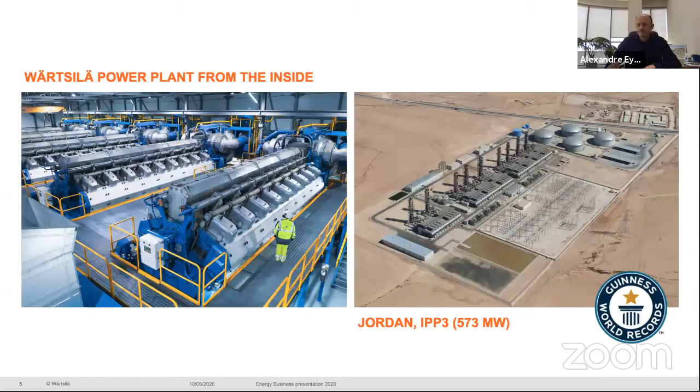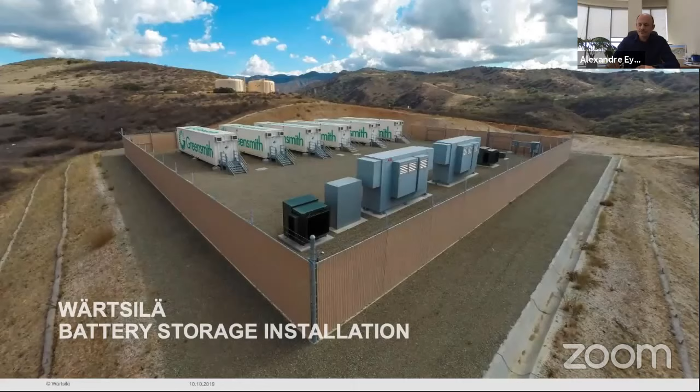Now, looking at where we are in the Middle East. Today we have slightly over 7 gigawatt of installed power with about 300 installations. Our headquarters is in Dubai, the center of the universe, I say, where a lot of our experts and the digital expertise are based. But we have positions and branches pretty much in the entire Middle East. Pakistan with Lahore, over 400 engineers to support the 2.1 gigawatt that we have installed. Jeddah, we have about 250 local guys to support our 1.9 gigawatt. And then obviously we have positions in Iraq, Yemen, Oman, Qatar, Jordan. So we are spread pretty well. We always love to be as close as possible to our customers.

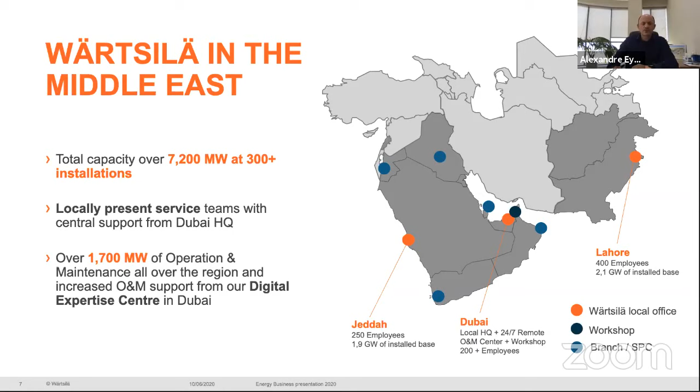Looking at the energy scenarios, Middle East countries are gradually transforming their fossil-based power generation fleet into sustainable and diversified energy supply, and we have seen it very clearly in the recent increase of solar activities. The question for us today is: will this be enough to reach the most affordable, the most sustainable energy? And how we navigate the path to this future is probably less clear. During the webinar, we're going to try to walk you through that idea. We want to help you understand better how the energy transition will unfold, with renewables becoming the base load. We believe we can help in designing and building the transitions with the proper planning, and we are ready to provide you with the best service that we can.

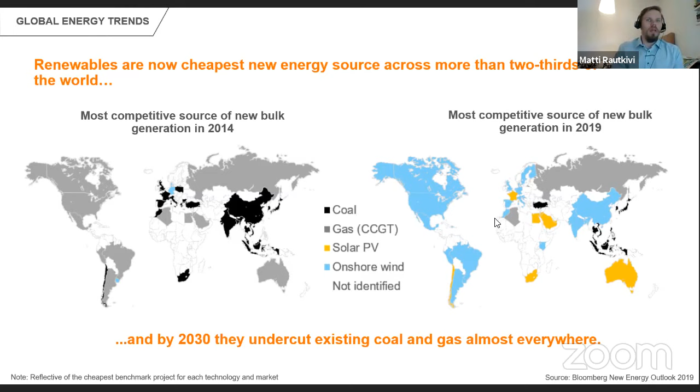And when economics start to play the game, things happen way faster. We have witnessed this transition already in countries like the United States, Australia, Europe, and now also the Middle East, heavily coming into the game with so cheap solar PV coming to the market. Moving forward, let's look closer at what it means from the installed capacity perspective, and how fast this will change the landscape by 2040.

What we call new technologies, renewables and flexibility, represent around 17% of the overall capacity mix in 2019. By 2040, in 20 years, this will represent 57% of the capacity. So a massive shift towards renewables and flexibility. Also good to notice that while total capacity in the world was around 7 terawatts, 7,000 gigawatts, in 2018, by 2040 it will be 15.5 terawatts.

Because of the nature of renewable energy, we will need more capacity, and a lot of investments are required. So one of the key things is to ensure renewable energy is available, that we are able to finance this and get these investments moving. Looking closer, what gets the eye every time is how much wind, which is light blue here, or solar will be installed.

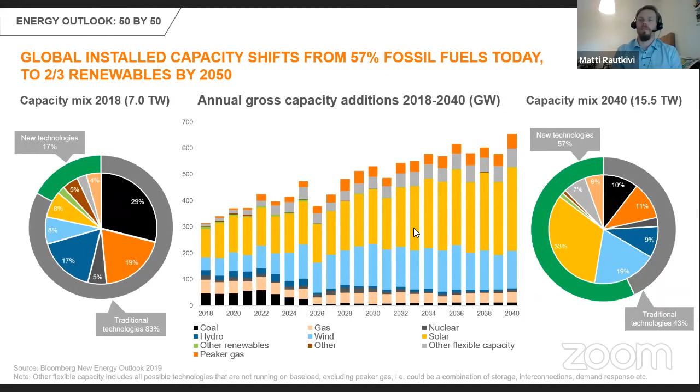But where we are focusing, and what Alex mentioned about our portfolio today, is flexibility: how you integrate these affordable renewables into the power system of the future. Here we see exactly the same kind of development. From the capacity perspective, flexible gas and energy storage are the fastest growing markets in the next 20 years, where we're going to see investments.

On the left-hand side you can see the light gray, which is baseload gas, traditional combined cycle gas, that is actually declining over time, driven once again by renewables changing the operational profile of these combined cycles. We have fewer running hours, more starts, and system modeling starts to heavily favor intermittent or intermediate and peaking types of application, which is the orange bar here.

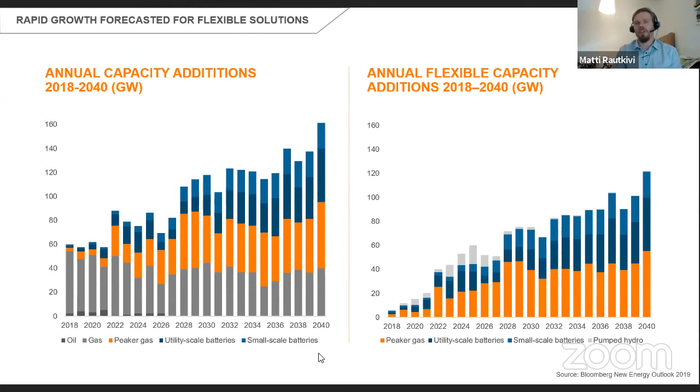So the market for gas engines and flexible engines will grow, according to Bloomberg analysis, from around a 5 gigawatt market, which has been the bigger market, up to 40 gigawatts by 2040. So massive change there, as well as in energy storage, which is also a heavily and fastest growing market.

So if we look at the energy trends, it's obvious now, when people start to understand how fundamentally renewable energy is changing the landscape, that there is no room for baseload anymore. We need more peaking capacity, and when you go beyond a certain threshold, depending on the energy system, energy storage starts to play a key role there on a massive scale.

I would say that in every power system there's value already today for energy storage, but when we start to talk about massive scale energy storage installation, then we are talking about a lot of cheap renewable energy and excess renewable energy available. But by 2040, so in the same time period, in 20 years roughly, we're going to see 122-fold growth in energy storage.

So even though it's a hot topic now, and we talk a lot about it, we celebrate the newest deals and the biggest deals, this is just the beginning of how the growth is coming.

So a lot of renewables, a lot of flexibility coming to the power systems. And now, even though we are in the middle of the crisis during the COVID-19 situation globally, and this is definitely a new situation for the whole world, something interesting has actually happened during this from the energy transition and energy system perspective.

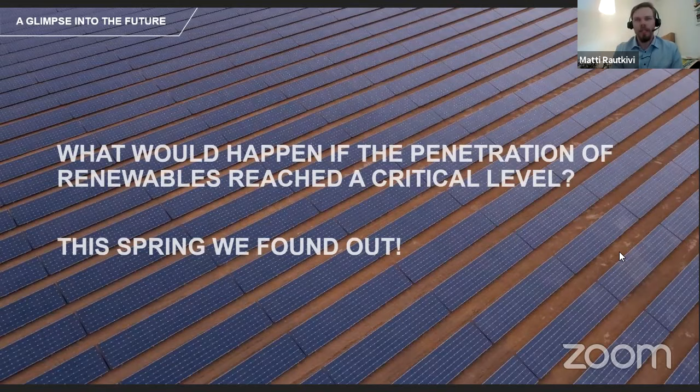This spring, we developed a tool. You can Google it, and here's the source, Wärtsilä Energy Transition Lab. It's a really cool tool that gathers all the information of the European electricity system. We can put basically any power system there, but the information from the European Union is easily available. And we can look at how the system is operating, what the price levels are, what is generating, what the transmission flows are, and how the systems are performing now.

So this has led us to a situation where we have a higher share of renewables than ever before, globally I would say, but especially in Europe, where a level of 55% renewables across the whole of Europe was met in May. And there are days when Germany, for example, is generating around 80% of its energy with renewable energy. So countries are experiencing massive amounts of renewable energy that we were expecting to see at 2030 levels as we continue the installations.

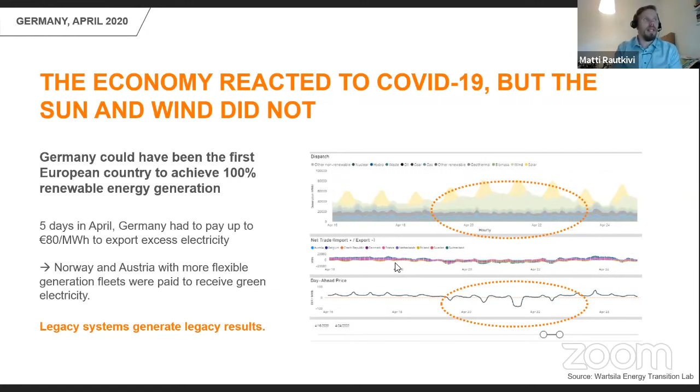As a summary, before moving to Patrick, I can say that the energy transition is going on, driven by cheap renewable energy, driven by economics, and that is opening a totally new era and an increasing market for flexible gas and energy storage. And go and check out what has happened in Europe this spring. That's just a glimpse of the future and evidence that this will make a lot of sense in the future power system.

So leadership on low-cost energy can play a crucial role for the countries to reach their Vision 2030 targets, and there are some changes in the energy mix which can also contribute to this transition. So let's see what changes we see in the Middle East. The first one is what Matti described very well, that renewables are becoming the cheapest source of electricity. This is especially true for the Middle East.

The region has excellent renewable potential. A solar panel in the Gulf produces twice as much energy as the same unit does in Germany. And let's not forget about the wind potential that the region holds. Saudi, certain parts of Oman, and Kuwait are all blessed with very consistent and strong winds.

So if you take a look at the screen, you'll see that solar PPA prices today in the Middle East are already below the price level where solar PPA prices from other regions are expected to be in 10 years. So no surprise that this makes solar PV generation the cheapest source of electricity, places it first in the merit order, and it also holds a huge upside potential to further reduce the blended cost of electricity in the region.

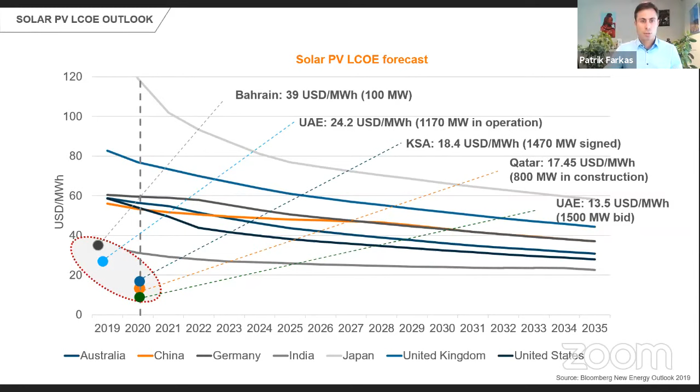This is a global trend, but moving to the second driver, this is very specific for the Middle East, and that's basically the decoupling of power and water generation. The Middle East is the largest market for water treatment, and nearly half of the global desalination capacity is located there. But while the rest of the world applies membrane-based desalination, the Middle East is still dominated by thermal distillation, which requires heat.

But now we see more and more countries committing themselves to phase out this old-fashioned thermal distillation, and it will have a very important consequence. It will lead to a structural shift. The traditional IWPP model will come to an end, and power has to be a separate, standalone, and competitive product. It will encourage competition between various power producers to generate power at the lowest cost, and also let a great portion of inflexible and inefficient generation leave the market. Then the gap could be filled with renewables or other smart and more sustainable technologies.

The third change driver is related to oil economics. No surprise, however, the long-term consequences of this are still a little bit uncertain. On one hand, we see that the current depressed oil price environment already puts great fiscal pressure on governments and government organizations, and encourages them to increase their operational efficiency and reduce their subsidies. We expect that this will also happen in the energy space, with improvements in transmission, distribution, and generation being introduced.

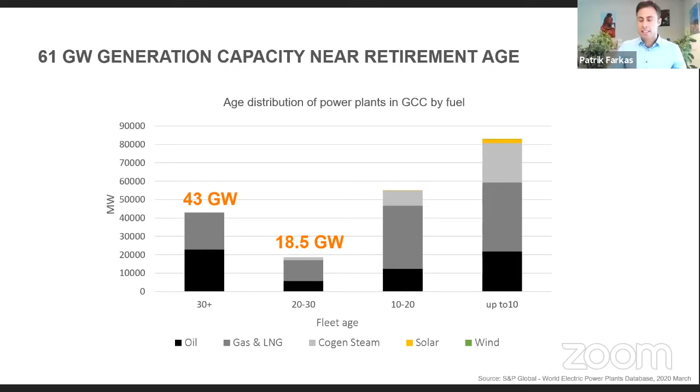So as a result of all these changes, I think that the way we see power generation in the Middle East has to fundamentally change. The GCC countries arrive at crossroads where they need to make agile decisions which withstand a 30-year time horizon. Countries and utilities have to make the right bets on future capacity development today, which will ensure long-term competitiveness, sustainability of their power system, as well as the resiliency of the grid.

The good news is that the Middle East is twice blessed. As said, there is an abundance of cheap fossil fuels and excellent renewable conditions. However, unfortunately, it's still not enough. Power plants with the lowest generation cost will not necessarily lead to the lowest system level electricity cost. The reason why, as Matti highlighted already, is that you still need one component: flexibility is the key word here. Dispatchable flexibility will be the enabler to really unlock this potential and will be responsible for seamlessly integrating various cheap energy sources into one well-working grid.

And probably this is the hottest topic nowadays in the energy industry. The role and value of flexibility is being analyzed by all of the major energy companies and energy agencies like IRENA, the International Energy Agency, and Bloomberg. They all published reports adopting slightly different mindsets. However, there is a consensus building in the industry that due to the price drop in renewables, the cost of bulk electricity is expected to decrease, although the role of balancing and ancillary services will be more important than ever. I have to note that this can only happen if there is a well-working, modern regulatory framework in place that properly values the system-level benefits that flexibility can provide for the whole grid.

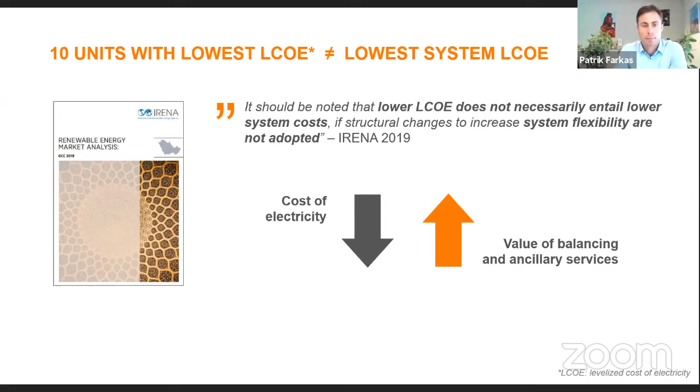So for the Middle East, I believe that the biggest challenge is to have strong and dedicated leadership that facilitates a mindset change, and that mindset change should be based on a true commitment to become a world-class leader in low-cost sustainable electricity in the Gulf. This may also assist the establishment of a second economic pillar.

So Matti talked about energy trends. I talked about the energy changes in the energy sector in the Middle East. But now I would like to demonstrate quickly how utilities can adapt to this new environment. Then together with my colleague Giriraj, we will briefly introduce some tools that can make this transition smooth and easy. So let's imagine a future power system where the penetration of renewables already reaches 50%. I know it sounds a little bit futuristic for the Middle East as of today, but this very much represents the situation in several European countries today.

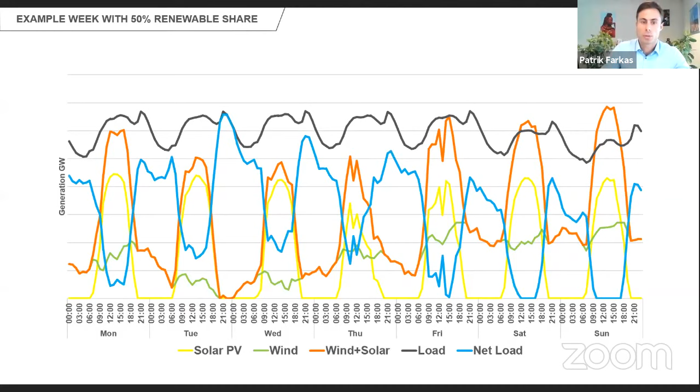In the past, 10 years ago in the Middle East, that load was only satisfied with generation from thermal, traditional fossil fuel power plants. But as more renewables feed into the system, the role of these traditional generators is changing, and they are being dispatched against the net load, which we get by deducting renewable production from the total load.

The point of this picture is to illustrate the key changes utilities are facing. First, the traditional baseload as a notion is disappearing. This was a very big, predictable chunk of power supply, but with the advent of renewables, this will be gone.

Fossil fuel power plants, the traditional baseload or dispatchable power plants, will see much more ramp ups and ramp downs. Their gradient and the magnitude of ramping requirements will increase. They will register more part load or low load operation, more frequent load changes, and on low demand, good renewable conditions days, thermal generation needs to be completely shut down, then has to come back immediately once demand picks up or the sun goes down.

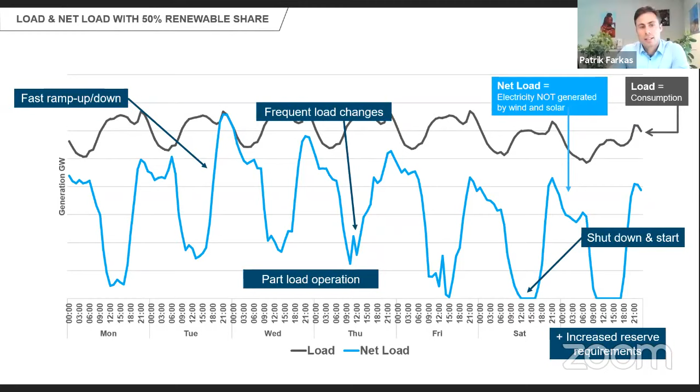So why is it important? Why do we talk about that? Well, the main reason is that traditional baseload, large-scale power plants, especially those with steam cycles, are not designed for this kind of operation.

It's very important to know that those assets are highly efficient units when they run at full load, flat out. But once they have to do more load following, more cycling operation like this, their production cost starts to shoot up, starts to increase.

Furthermore, this can also lead to system reliability issues. These large baseload power plants have a quite limited operational threshold, which can lead to either unnecessary curtailment of renewables, or even worse, grid reliability issues.

All in all, this graph illustrates that the requirements are changing for dispatchable power plants, and a bigger portion of the traditional fleet has to handle load volatility, this variable load, without significant cost consequences.

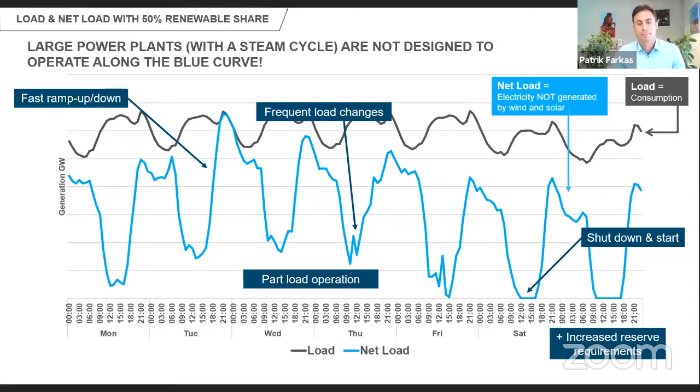So a modern utility will have a much more diversified portfolio than most utilities have today, but then the share of flexibility in these portfolios will be much higher than it is today.

We think this trend will also be reflected in the capacity selection criteria of resource planners. Therefore, flexible power plant properties such as ramping gradient, starting cost, minimum up and downtime are becoming increasingly important factors. Seeing all the solar projects being announced in the Middle East, we see a big room for additional flexibility, which can be provided by flexible thermal plants, by energy storage, or even by demand side management to some extent.

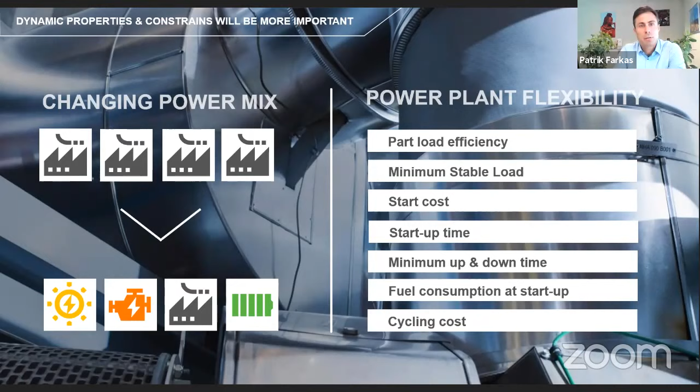I had some discussions with local players, and I was surprised that when it came to mid-merit or peaking operation, their first idea or choice was open cycle gas turbines. And when we started to talk about gas engines and generators, they were thinking about a small kilowatt scale industrial application.

Well, the reality is that flexible engine-based power plants come in much bigger units, 10 to 20 megawatt units, and a selected number of gensets can be deployed next to each other. They provide higher efficiency than open cycle gas turbines, even in high temperature conditions.

What really distinguishes them from the rest is that fast ramping capability. These gensets can be up at full load in 2 minutes. Having 10 of these assets next to each other can allow the operator to inject 200 megawatts of power into the grid in 2 minutes, or also the other way, drop the load, for example if the sun suddenly comes up.

Unfortunately, in this webinar we don't have time to go into more details of engine technology, but this webinar will be followed by a webcast series focusing on Middle East energy issues, and we will dedicate one episode specifically for this.

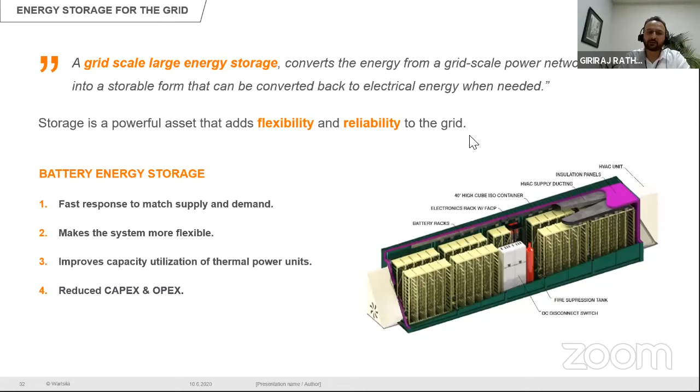Prices - I'm not going to go into the details on how low, maybe we can talk about that in the Q&A, but the falling cost of storage is now the new reality, and the use of affordable storage in combination with renewables is honestly the real game changer of our times. If you look at the LCOEs of the more recent projects for grid scale opportunities, we can safely say that PV plus BESS has already reached grid parity with gas-based power plants, at least in some regions. Also, from an OpEx perspective, batteries have substantially lower standby costs compared to rotating equipment. So overall, CapEx, OpEx, the use of BESS makes absolute economic sense.

Ancillary services - I think this is something that not many people talk about, but it's becoming more and more talked about as renewables are getting added onto the grid, and the thermal fleet is acting a little differently. So the name storage can be a little misleading, because storing energy for shifting is not all that a typical BESS does. The same battery that can do energy arbitrage can also meet ancillary services needed for the grid.

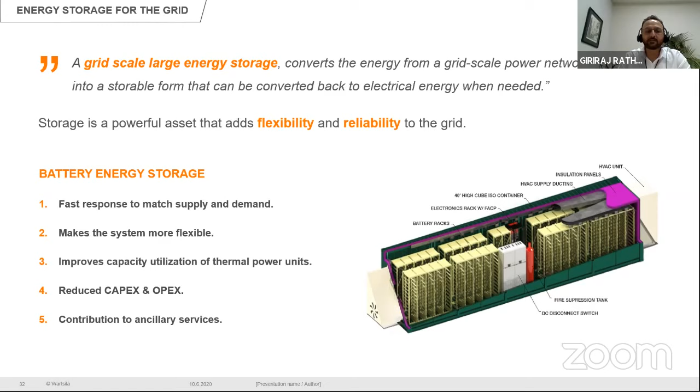Leading utilities have conducted studies, and they've found that using BESS to provide a range of ancillary services like frequency response, in the case of PV, it's PV ramping, PV smoothing, etc., really allows them to free up the existing thermal assets, and it's much more economical on a revenue per service basis. So these are all services, and they have a certain revenue, and in that sense, on the revenue per service basis, there's a huge economical impact.

What this basically means is that if you had a utility or an IPP, under the current operational philosophy, it would be required to reserve a certain percentage, say about 10 to 15% of a turbine's nominal capacity, to meet the primary frequency response, right? Now, if secondary frequency response is also required, it would again be taken off the same thermal asset, meaning that a typical thermal asset would never be able to operate at its potential.

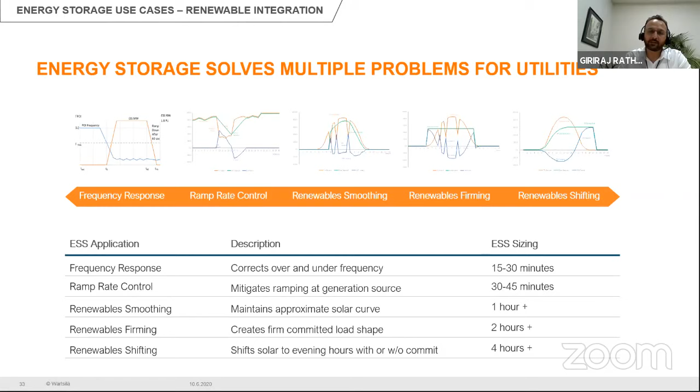So now it's clear that more renewables on the grid bring down the cost of generation, and also significantly reduce the carbon emissions. But what's on the flip side? If you look at the flip side, it does add tremendous intermittence to the grid, right? This is something we've already established. So a solar plant could cater to, let's say, a gigawatt of demand at peak hours of the day. But it also means that in case of a cloud cover, the sudden drop in generation, which can run into a couple of 100 megawatts, must be met by other assets.

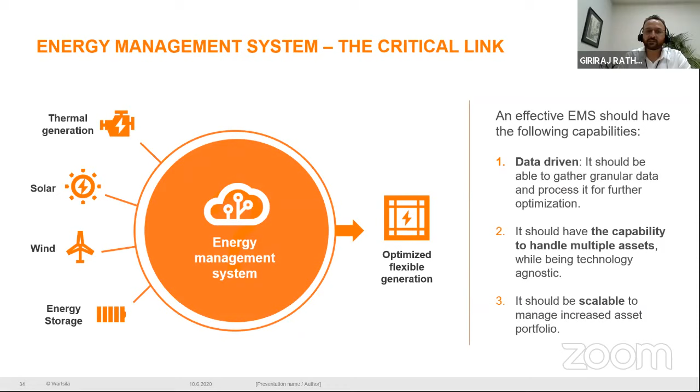So this sudden ramping is not easy. And the ability of the power system to respond instantly to signals from the grid operator becomes a very key factor here. So this sort of flexibility requires a very efficient energy management system. And that brings me to the most critical element in WÄRTSILÄ's value chain, GEMS, as we call it, the energy management software that is really the backbone of our energy transition. Right?

So GEMS not only works as an EMS for integrating energy storage with the other grid assets, but it also serves as an integrated software platform itself for operating power plants and the grids intelligently. So you have the grids operating in a certain manner. By introduction of GEMS, you can make them function in a very, very intelligent manner.

So if you look at energy optimization, what does it really mean for a country, right? At the country level, energy optimization is all about being able to benefit from the diverse portfolio of assets that a country has by ensuring that the least expensive asset is always available for dispatch. And that's really at the heart of what GEMS does. So we don't really have the time to go into the architecture details, but let me just give you a brief aerial view of how GEMS works.

So if you look at this diagram, you could see that we have multiple generating assets at the grid level, controlled by a local power plant controller. It could be GEMS or a power plant controller from one of the existing assets. And this is monitored by an on-site operator for alarms and signals. This platform is then connected to the cloud through a fleet director managing multiple power plant controllers. And the data that is available there can be analyzed by data analysts, and they can remotely make optimizations at an asset level, thereby maximizing the renewable penetration. So let me show you the same concept with an example.

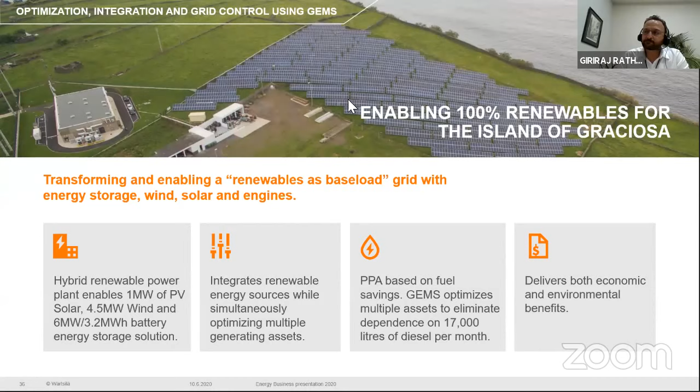So the previous example was more about the complexity of operations rather than the size of the assets involved, because it was a much smaller site. But the same philosophy can easily be scaled up for bigger installations also.

We have installed over 70 facilities globally, and building on the success we've had in the US, we are now growing our storage business worldwide with more recent successes in Europe and Asia. We've signed, I think, about 5 deals in the last year, the latest one being the 100 megawatt hour BESS with Pivot Power in the UK.

So this is it. This talks about battery, our software, and the overall integration. And I really hope this makes you think a little differently when you think of Wärtsilä as only an engine power plant manufacturer, because we do storage and optimization as well, and we do it very, very well.

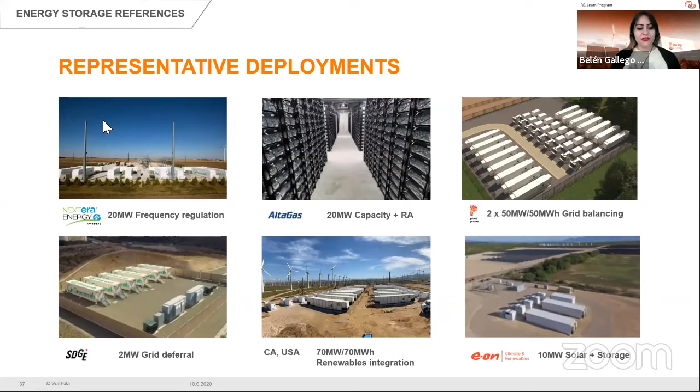Thank you very much, Giriraj. May I ask you, please, to stop sharing your screen so that we can see you all in a large screen? Sure. And I have a few questions. I know that you guys have been furiously answering some of the questions there, but I have some for you from what I've gathered from the audience as well. We don't have a lot of time, so I'm going to direct each question to you in turn, and if you want to add anything, please feel free. Am I still sharing my screen, by the way? Sorry. No, you're fine now. Okay, it's all good. Perfect.

All right. So, Alex, there was a question about the impact of the COVID-19 crisis on the energy plans of the Middle East. Could you answer that live as well? Yeah. So I think we have not foreseen any drastic changes. If I talk about the behavior of Wärtsilä in the region, I think we have actually been as active as ever. So that didn't have any effect.

But if we look at the transitions that we're foreseeing, we may see some slow delay, but I don't think we see any change of mind. The market in the Middle East is moving towards renewables and therefore towards energy storage, and looking at more flexibility in order to get the cheapest, most affordable energy sector. So no big change, I don't foresee.

Thank you very much. And Matti, you talked about energy trends, but you didn't mention hydrogen or, for example, concentrated solar power or other such technologies. Do you think any of this may also be important in the future? Well, absolutely. Hydrogen is the hot topic now. If you asked this question 2 years ago, I think we were the only ones talking about hydrogen and the importance of synthetic fuels, and it's actually a next step, a consequence of this energy transition when we start to have cheap renewable electricity, excess electricity available. So electricity becomes a raw material for something else, and that enables the hydrogen economy.